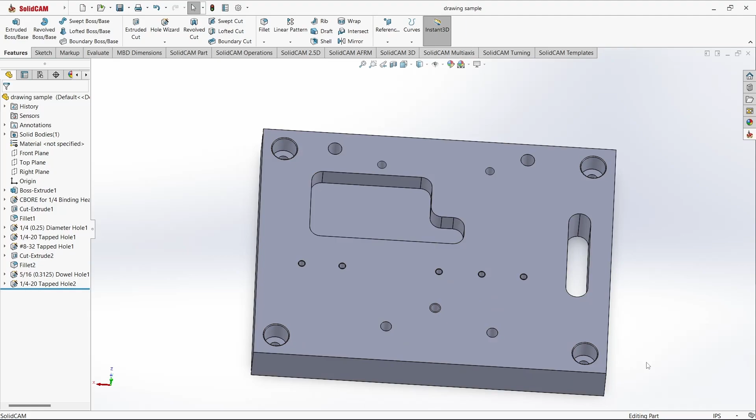And again, don't take offense at what I'm saying in this video. If you are not doing this, maybe it will help you make better prints and better models, or for those machinists out there who don't have a lot of experience, just started out, or don't know a whole lot, I hope this video can help you too.

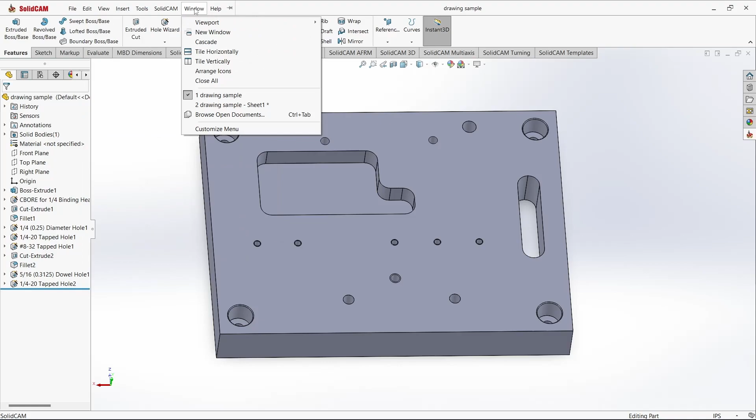So let's see, I just made a model quickly here and put some detail on the print, and then we'll see what I can talk about and start from there. All right, so I dimensioned it out here fairly well, but take no offense because I'm not a good CAD person, I'm just good at my job, which is machining stuff for you. So let's talk about some dimensions here.

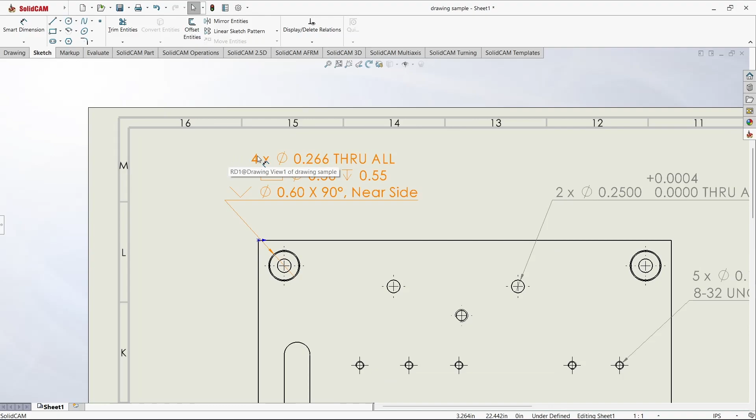Let's say for this one, when you dimension this, I know these four holes are the same, right? And I know all four holes have this dimension, tolerance and size. But I've seen some prints that don't put a 4x in here, which I think is still fine. But don't you think it's easier just to put a 4x in there? It only takes you a second, and the machinist understands all of this without even looking at the 3D model, right?

So that's the first. The second one is the dowel pin hole. So I put two of these dimensions out here, which I think is much better and easy to understand. When you see that icon, you know it's a dowel hole, and you see the dimension with the tolerance, you know it's a press fit for this dowel hole. Again, with the 2x, 4x, it's much better for me to understand these two holes are the same.

Let's just say if you put 1x, technically I still understand the two would be the same. By looking at the 3D model I can see they're the same, but it's just easier for me to look at the print here and say, oh, these two are the same, I do them the same.

And with this dimension here, I have seen engineers make the dimension and tolerance like this. Let's say your print with 3 decimal places is plus and minus 0.005. When you dimension it like this, even though there's a dowel hole symbol here, technically I can just drill it. I don't have to ream it, and the hole is still within your tolerance. But in reality it's a bad hole, because you want a dowel hole, you want a press fit, and you dimensioned it like this.

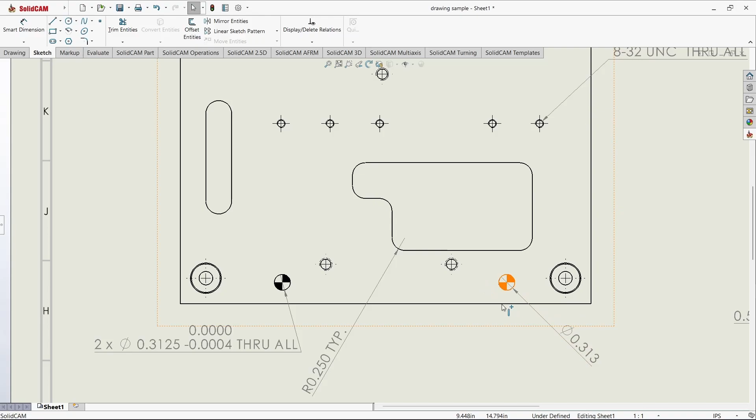And when the machinist looks at this, I mean, for me, I don't do this. I have to ask again. But for me, if I can't get hold of the guy who made it, I'll just drill it. And therefore, you have a bad part, right?

So I have seen people talking about lean, or talking about making parts better, faster, more efficient, or something like that. And then their engineer makes the print, and it doesn't give the machinist enough information, or gives bad information for the machinist to work from.

So, okay, back to this. This is a dowel hole too, but it's not this symbol, but it's still a dowel hole, right? Even though I see just a regular hole, when I look at it, I know this is a dimension for a slip fit hole. Therefore, I'll make this one at this dimension and at these tolerances. Unless this is just a regular hole and you just did this for fun, and then you just waste the machinist's time.

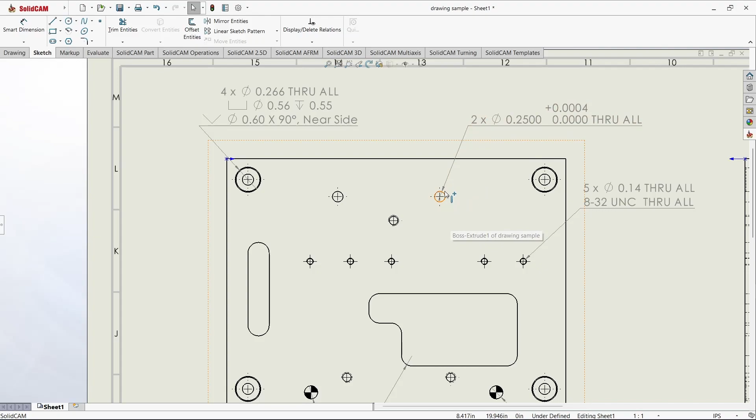But that's how good an engineer is when they put information on the print, and how easy it is for the machinist to do their job when they look at all this information and see how they're going to make the part. The more information you put on the print, the better for them to understand what they're supposed to do.

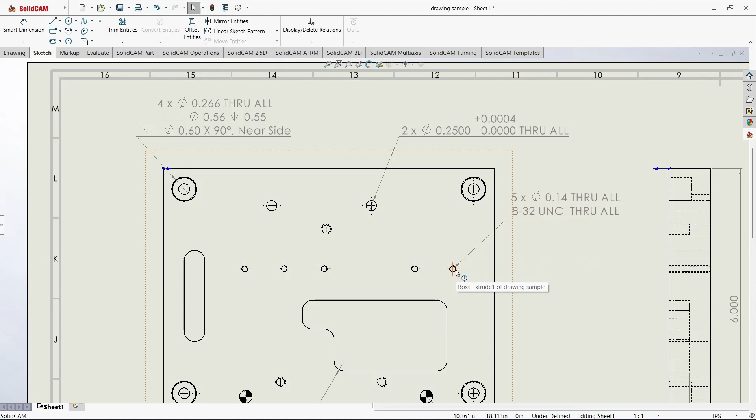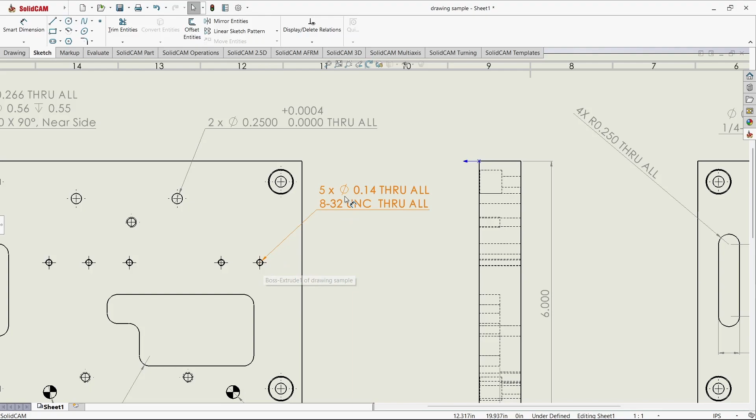Okay, so the next topic is tap holes, right? Let's say in the model, in SolidWorks or whatever software you use, you make this tap hole through. But in reality, the tap hole is not through, right? Let's say on this side or on the other side, front and back, something like that. If it's not a through hole, I mean, the real hole can be through, but you don't need to tap through, then modify it and put something here. So as the machinist, I don't have to tap all the way through.

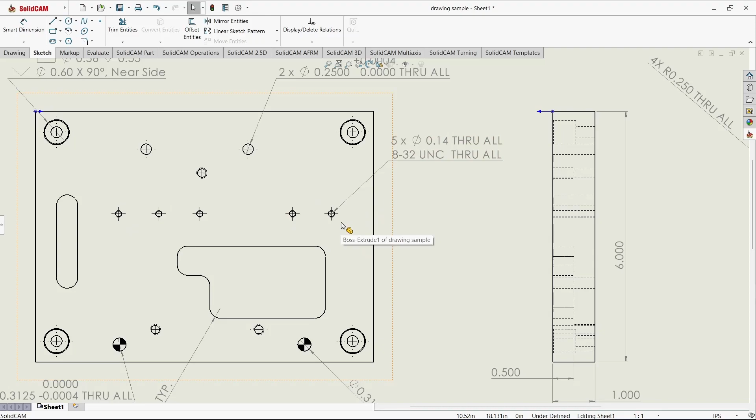The reason why: let's say this is 1 inch, and let's pretend this one is stainless steel, and you want the 8-32 tap all the way through. I cannot tap through here with the machine, so I have to hand tap it. Let's say there are only 5, but if you have 10 or 20 tap holes in there, do you know how long I have to hand tap to get through all of this? But the worst thing is you don't need to. You only need, let's say, 2 or 300, to bolt something on here, and only a little bit of tap to hold that piece in place, on either this side or that side.

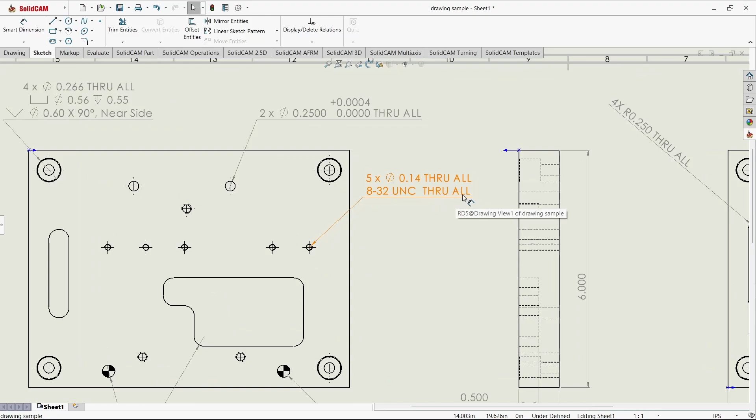When you don't need to tap through, don't put tap through all, because when the machinist sees this, he's going to tap through. And back to lean and making parts fast: why does this part take so long to finish? I may finish it in 1 hour, but I spend 2 or 3 hours manually tapping these holes. Just one mistake you make here, and the part takes 2 or 3 times longer.

So, back to those who make the print and the dimensions and all this stuff. After you dimension, after you finish, think: do I need that? Take a second look or a third look and see if you really need it or not. Then you make the machinist's life much easier. Okay.

And back to this one, let's say I put 250 typical. It means that as the machinist, I understand all these radii are the same. Then when I select a tool, I know what tool is going to fit in here and what not. So I don't need to check every radius. With this information here, I know they're all the same, right? Okay.

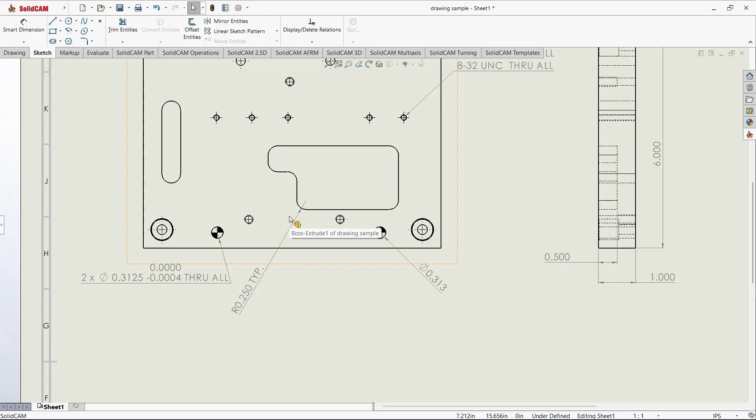So go over here, back to the same with the thread: what side you need the tap put on, then put it on that side, right? Dimension on that side, give tolerance on that side, and then we as machinists understand, oh, this one is a through hole, but it's gonna be tapped on this side instead of the other side. And since it's only half inch down, I don't have to go all the way through. Therefore, you or the company will save a lot of time, right?

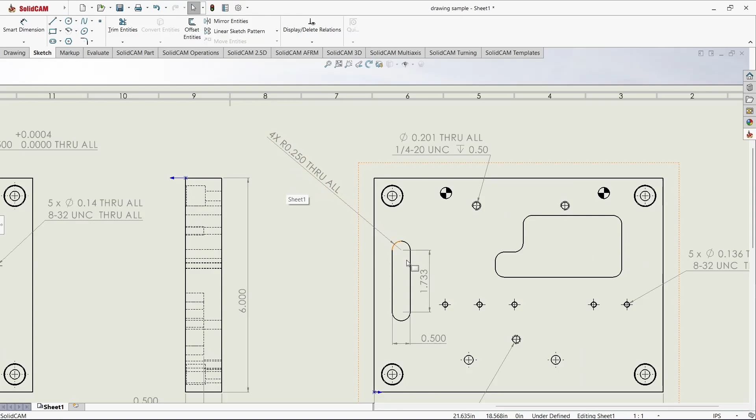So I think you get the idea, but that's how machinists look at the print and understand what they're supposed to do. Back again with this, even though I don't have the 3D model, with this I don't know if it goes through or not. But if you dimension something like this, then I know this goes through and this is the radius of that slot. Okay. And something like this, so they have a visual of what it looks like. Okay.

All right, so let's see what else to talk about. As you can see, I don't dimension every hole location of this part. Why? Because I work with the model. I make the program from the 3D model. So I have to trust the machine to machine this location well. Let's say I put the origin in the center, and then each hole location from the center out should be good, because I trust the machine to do good.

But let's say for this slot here you want exactly from here to here, let's say half inch plus a couple of thousandths minus nothing, right? Then at the machine, when I see that dimension, I need to check it, and see if it's good or bad. But again, you don't have to put the dimension out here for me to understand from here to here, because if not, then I will go with the print tolerance, which is normally plus and minus 5 thousandths.

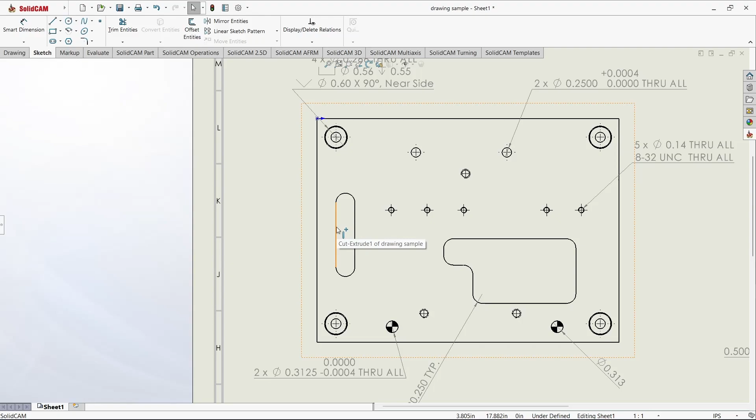And if you want a precision location from here to here, exactly what you want, plus a couple thousandths minus zero, then put it on there. But don't oversimplify the print dimensions or overcrowd it, right? So put in what you think is important so the machinist makes it, checks it, and makes sure everything is right.

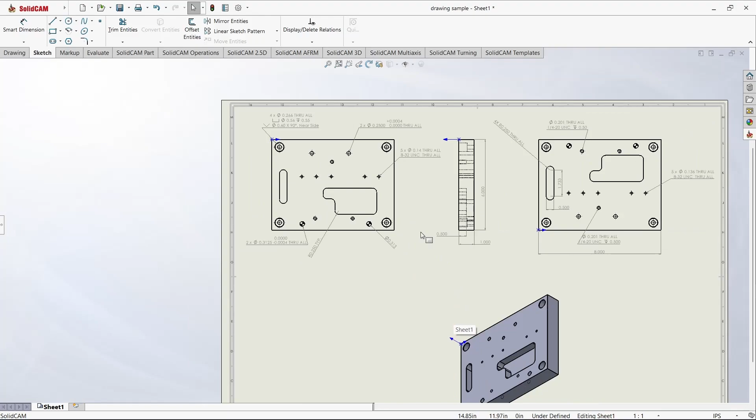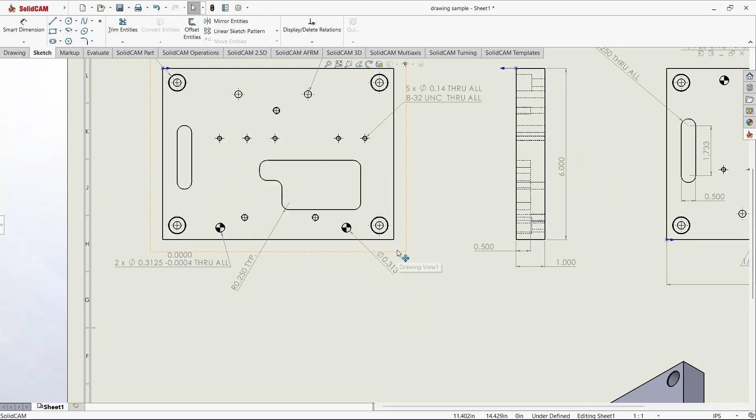I've seen some prints, not some but a lot. They do like this, right? Or they don't even put anything. They just put the outside dimension, something like this, and then just a couple of things, and that's it. But for me, I think that's not a good print because I don't see this stuff. How do I know what I'm supposed to do? Then I have to find you and ask you for it. Or even though it's a down hole, with this tolerance I could just drill it through and make a bad part, and then it's gonna be made all over again.

So by no means do I want to offend anybody. I am not the best dimensioner or drawer, but if you are an engineer making the print for the machinist, dimension it as much and as good as you can, then take a second or third look and see if all the information you put on there is good enough. And I don't think it takes you long, because when you design, you know what it's supposed to be, what precision hole or feature is important or what needs to be checked. So it doesn't take long to put those dimensions out and make the machinist's life easier.

And if you talk about lean, or making the part better and faster, then don't put something that's not necessary. Don't put something that makes it harder for the machinist to do. Okay.